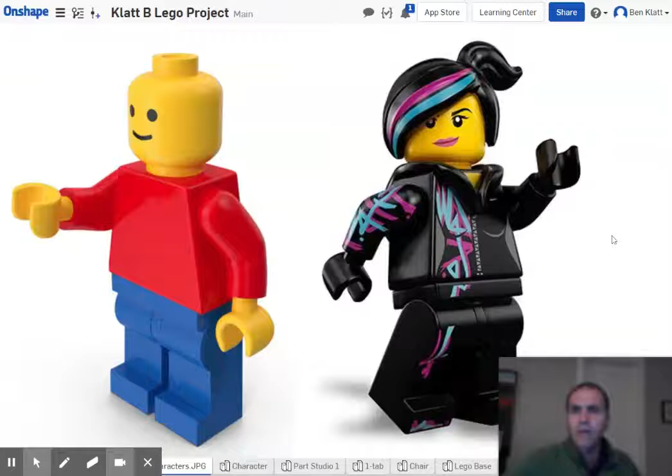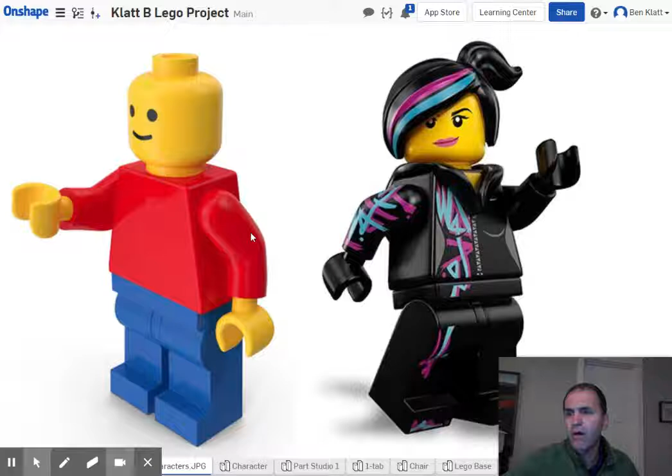All right folks, welcome back to our series on building Lego characters. We've got the body parts with the head, we've got the arm built, and now it's time for the hand, which is a little tricky mainly because this cylinder comes off of this other cylinder at a bit of an angle.

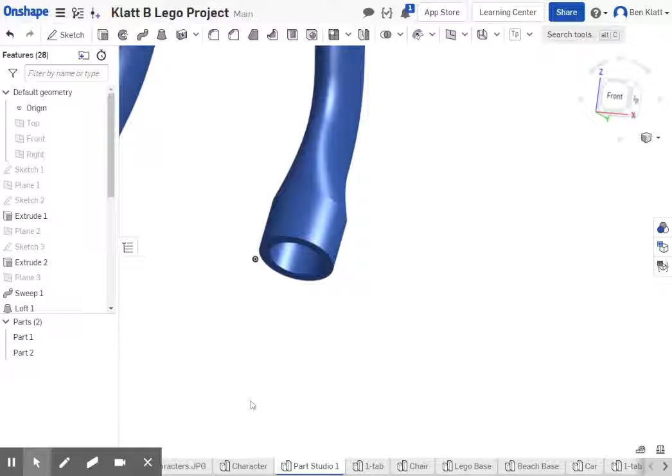Let's get started. First, I think the diameter of this circle is about 1.5 of that. So let's take a look at the arm we made and do some measurements. I know the inside was 0.125, the outside is 0.175. So we're gonna deal with that. Now I think I'm gonna make this in another part studio because there's no planes in here that match with the center of this, and I'll have to assemble it anyway.

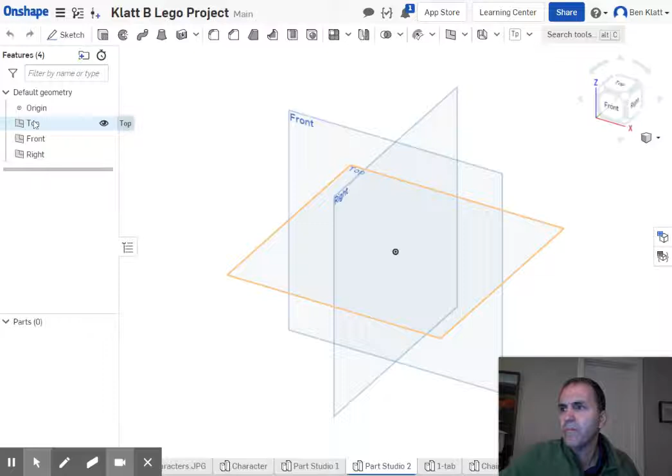So let's start a new part studio. It doesn't matter what we start on, as long as - I think I'll start with the top. And as long as I start at the origin, and that's going to become clear in a little while. So let's turn off all planes. Oh, I guess I didn't sketch on there. New sketch. There we go.

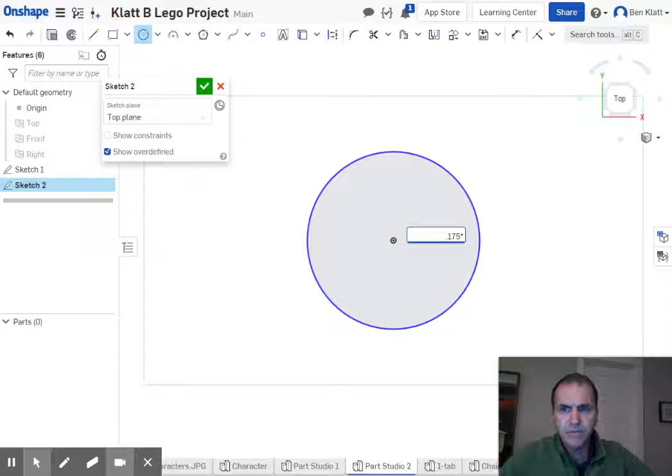All right, view normal. We're going to make that first circle hooked up to the origin. And the other circle was 0.175, and this time I'm going to put times 1.5. There we go. Let me make sure I had that right with the 0.175. All right, good, cool.

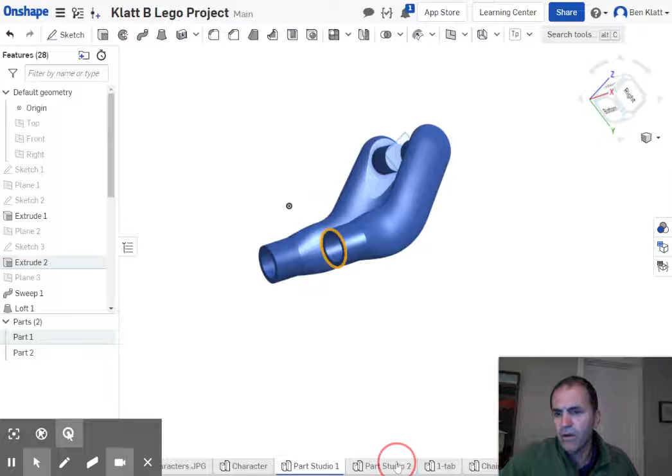All right, so here we go. That's going to be the main claw. There is another piece inside, and I wonder if we can make it as big as 0.25. We're going to have to make it its own thing.

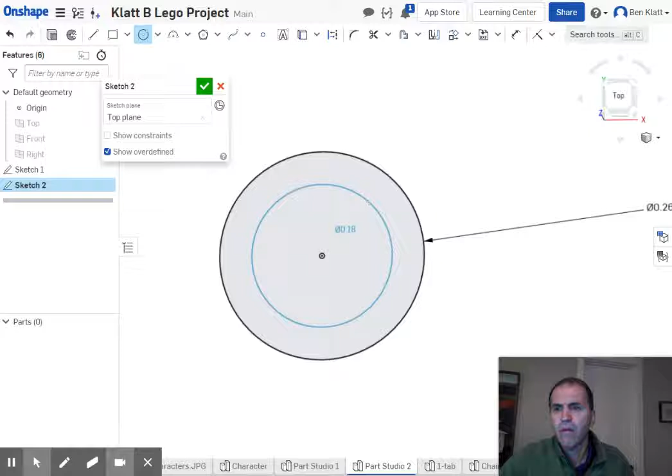Now, in case we make accessories later, like something for the arm to be holding, I probably ought to make this a normal size. So let's dimension that to 0.1875, which is a typical size.

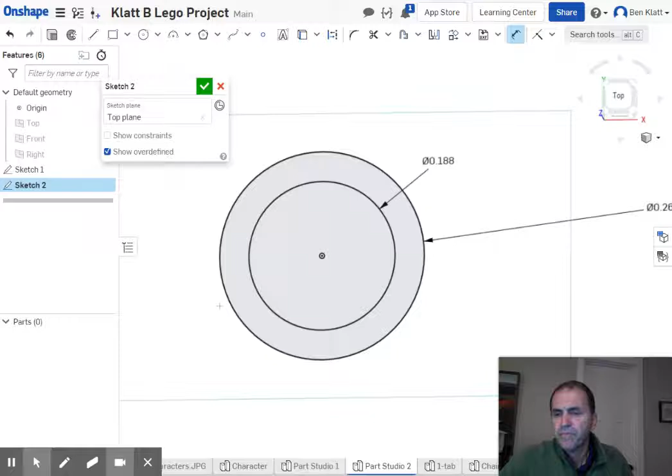And now we have to figure out how we're going to cut this thing. So let's take a look at how this is kind of cut. It goes pretty straight from here, maybe a little bit inward. So we're going to kind of come out like this. There we go.

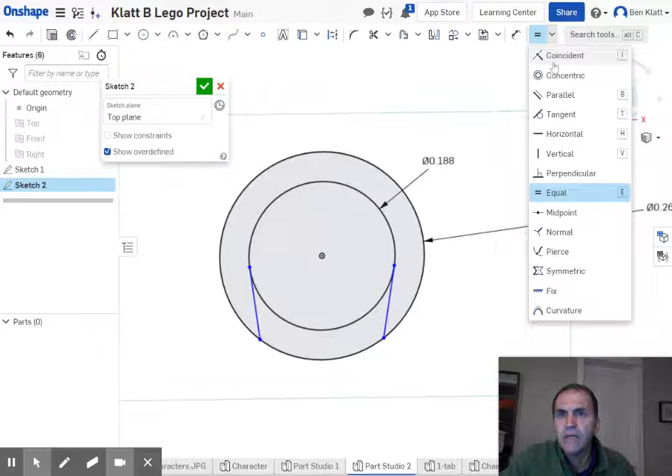Again, we're going to use our constraints to do things like a coincident constraint between this and this, and that and that. Let's make these two things equal to each other, that equal to that, and some tangent constraints to make sure that's smooth with that and that is smooth with that. All right, good deal. Let's make sure by hovering over them, I can tell if I did it or not. All right, good deal.

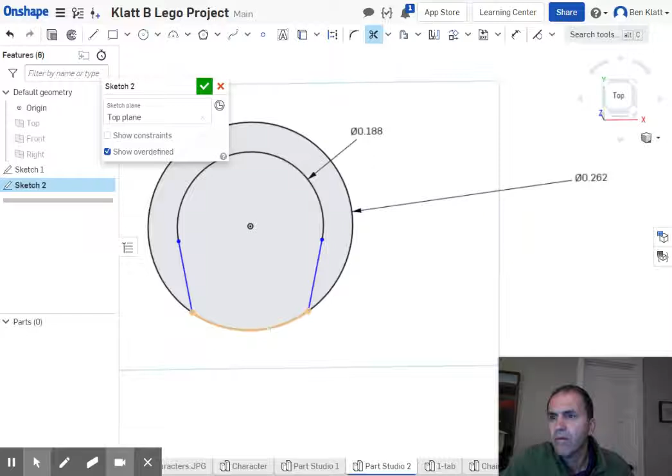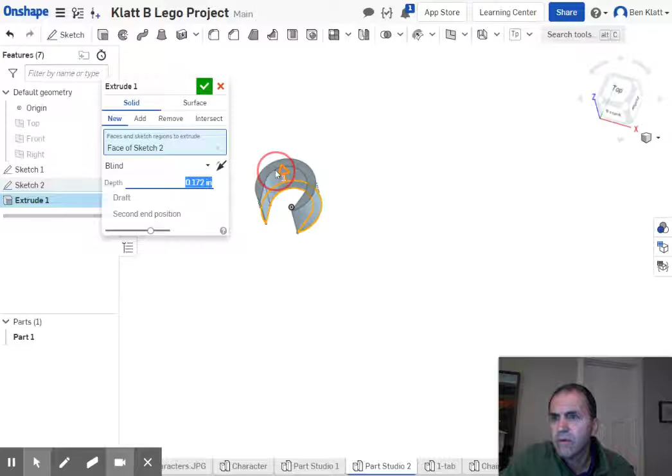Now move that in just a little bit, about like that. Now we can do some trimming, and some filleting that I think I'll do in a little bit - I think I'll do that second rather than now. So we're going to extrude to what works. Again, we're trying to make it look about right.

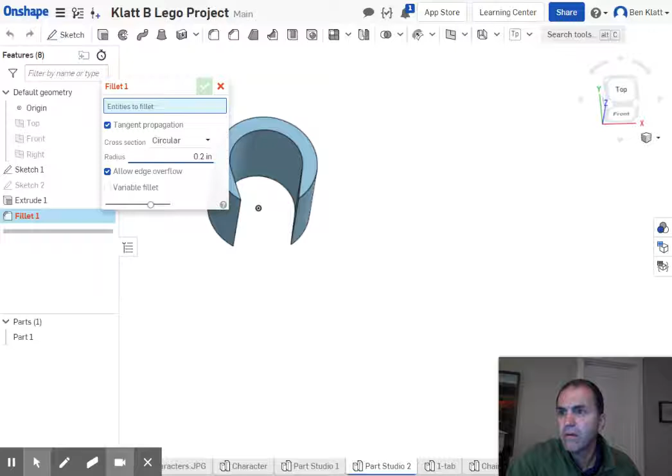Okay, let's go 0.22. That looks pretty good. Let's fillet these little corners just a tiny bit, like 0.0 something, and just take a look and see how it looks. Well, that is not very much. I don't know why it didn't like one side. Huh, let's try that again. Not sure why it didn't want to do that.

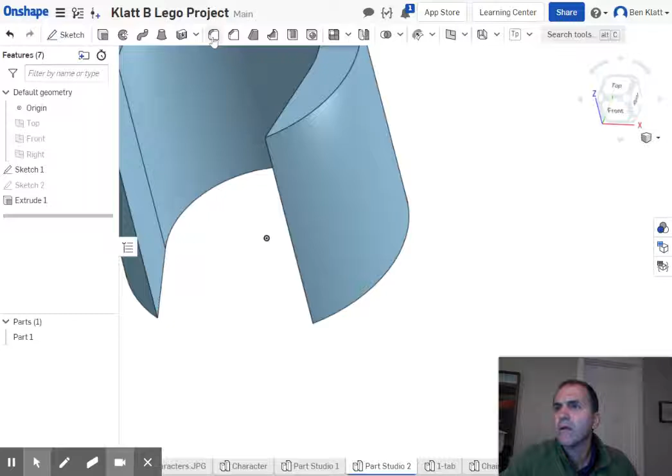I'm going to fillet this edge. I know 0.2 is going to be too much. Let's try 0.05, just to see how that looks. It does not want to do that. All right, well, let's delete the extrusion and see if we can go back into the sketch.

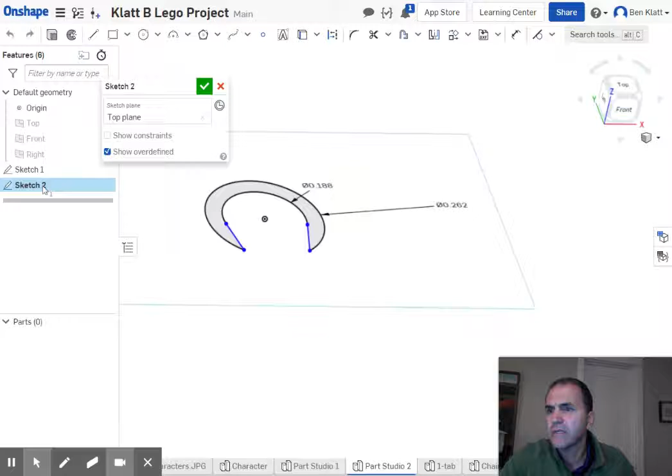Now why do I have two sketches going on? That's kind of interesting. Let's turn off sketch 2. Yeah, sketch 1 doesn't have anything going on, I'm going to delete that. Always pay attention to your browser, because it's telling you things that you might not know from your vision.

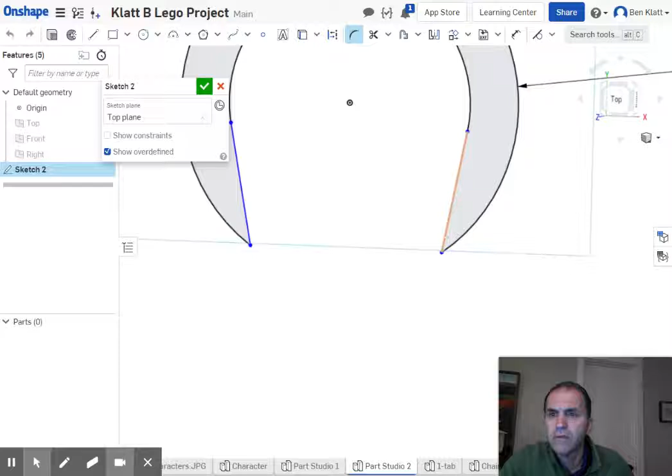Okay, we're going to try and fillet this, and go from here to here. And I'm getting that same problem I was having before.

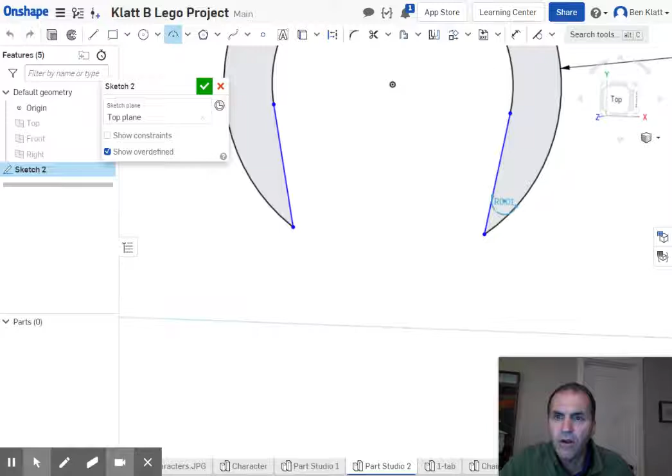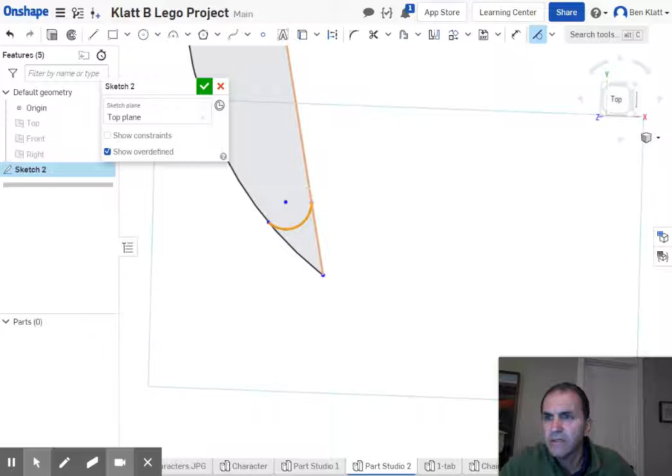All right, I've got a different way of doing this. We can go back into our sketch and draw an arc instead. We're going to go 3-point arc from there to there to there, and make tangent constraints, that to that and that to that. Do the same thing over here, to there, to there, and tangent. Whoops, tangent, that to that and that to that. An easy way of making sure they're the same is I'll make them equal to each other, like that, equal to that. And just for good measure, we'll do a horizontal constraint between the center points.

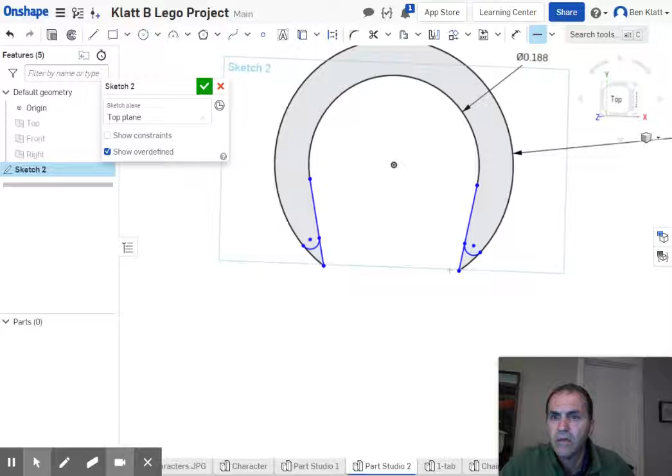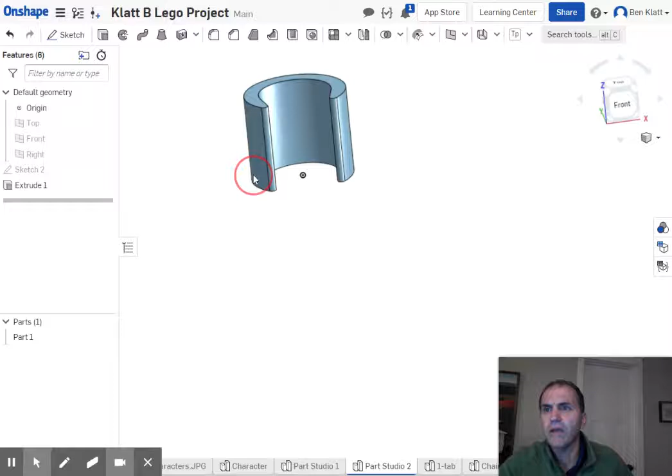All right, and now when we extrude, I'll just extrude that. Again, I think we went to 0.22. Like the way that looked. Can turn off the sketch again. Okay yeah, that looks much better.

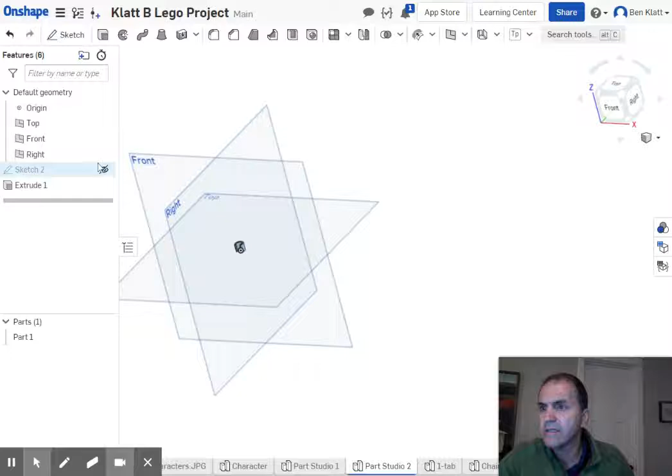All right, now we're going to draw that. Actually, let's sketch. I need to remember which plane went right through the middle here. It was the right. Okay, so I can turn off the front and the top. I'm going to sketch on the right.

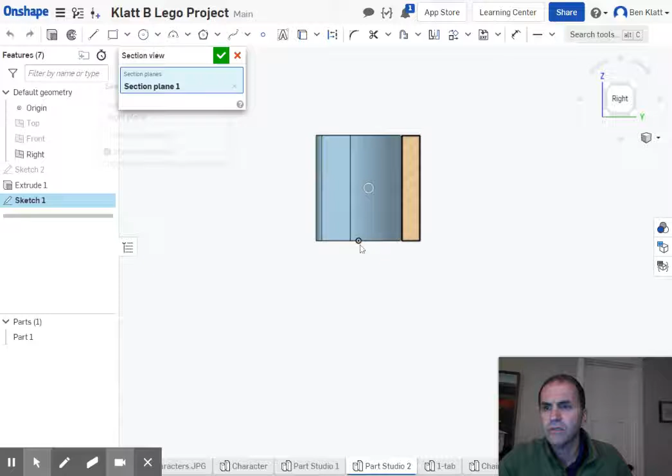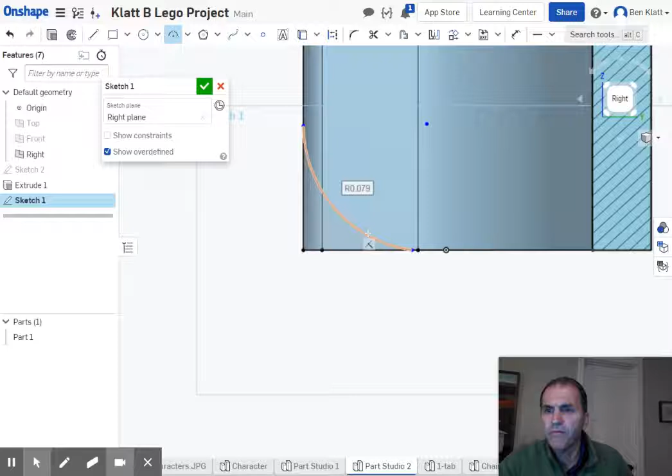I'm going to view normal, zoom in here, and also section view this so I'm looking in the middle because I want to cut off that little arc over here. I'm going to use this edge here and this edge down here. I'm going to make myself an arc. It's going to cut off the bottom, and again, using my tangent constraints. There we go. And finish my sketch. Let's turn our section view off.

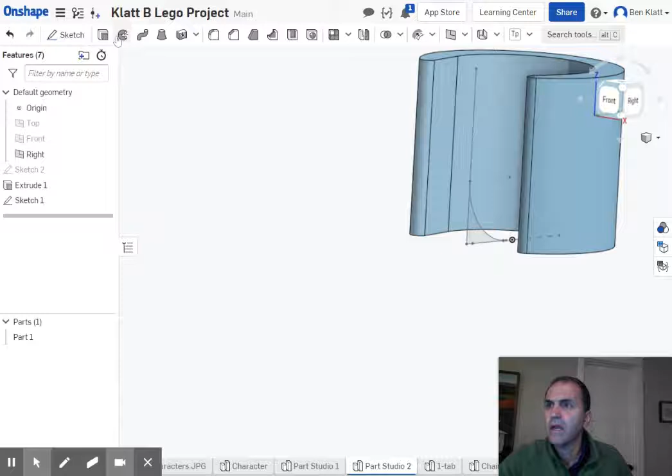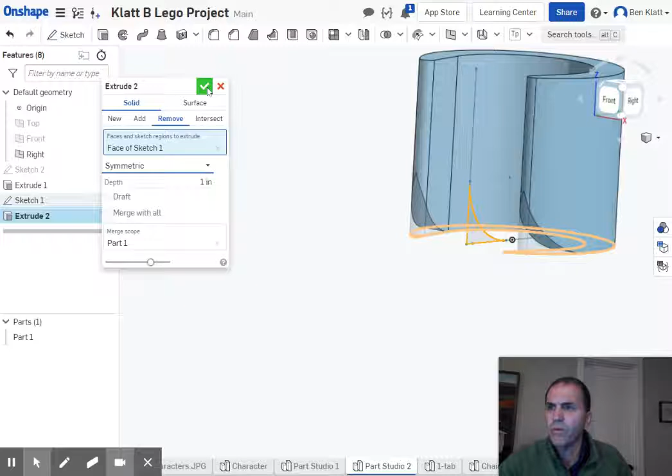And now we're going to take this guy and we're going to cut symmetric. We're going to go both directions. We're going to remove through all. Now I want to go through. There we go, I don't know why it went off symmetric. All right, yeah, that's starting to look a little bit more like it.

Let's see how it looks when I look at the characters. Probably need to cut off the top part too. Let's go back to that.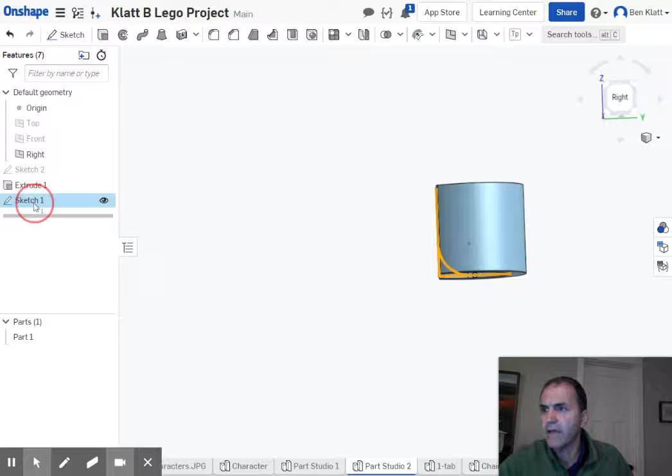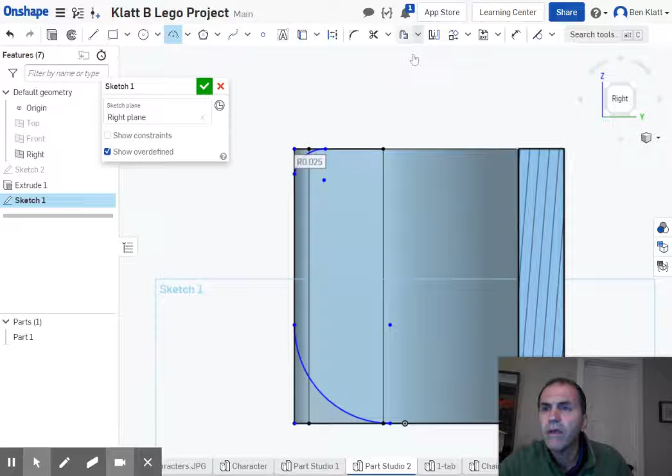So let's delete that and go back to our sketch 1 section view again. This time I am going to also project these edges up here. Make another smaller arc than that one, just kind of smooth it out a little bit. And we're going to tangent constraint again. And see how that looks. That's looking pretty good, I like that. This time, turn my section view off again.

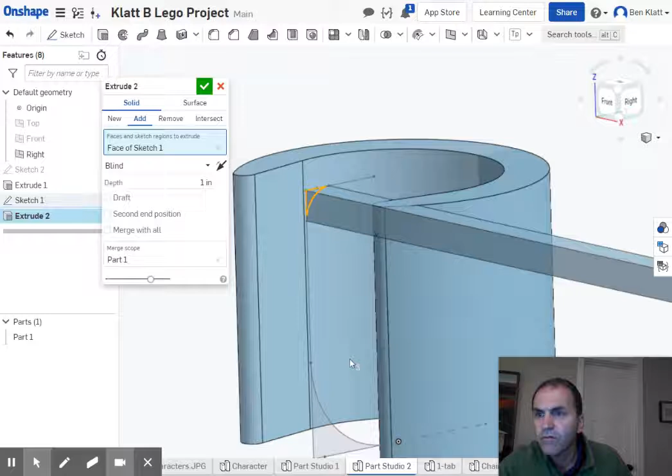This time I'm going to extrude both of those things, this shape. I'm going to remove symmetric. Okay, and right now I'm going through all of it. All right, much better. Now we could do filleting and everything else, except that's looking as good as I'd like it to look.

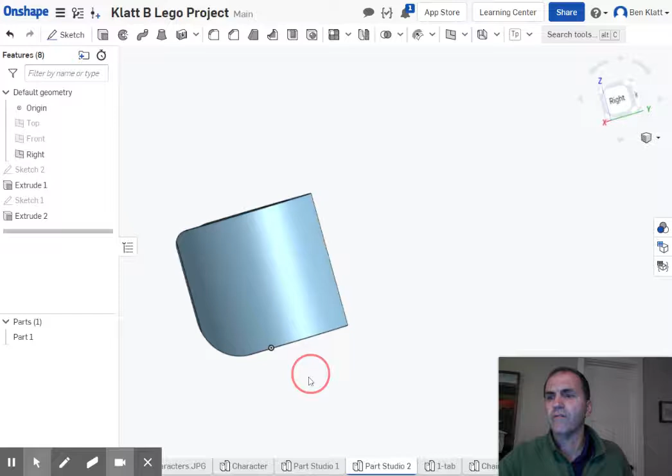All right, so now we need to do a sketch on the right again. I'm going to section view again. And this time we're going to make that little peg that comes off, but it comes off—if we look back at this—it kind of goes downward at a little bit of an angle.

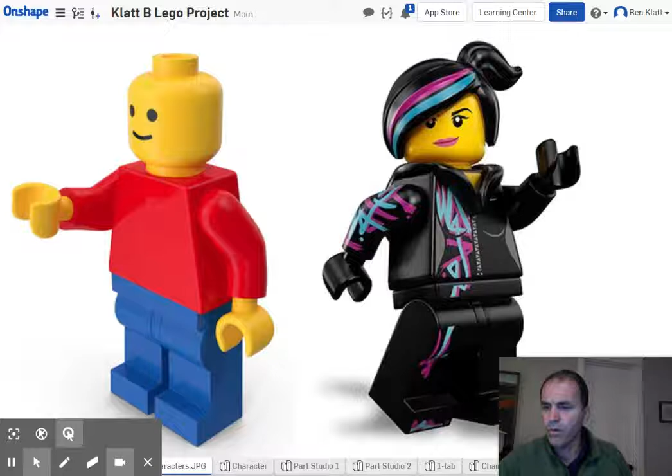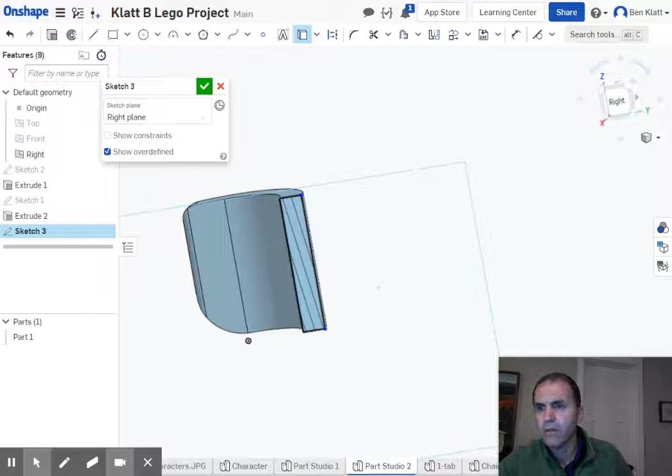So we're going to make a line here. And in fact, I think I'm going to do just a revolve here. So use that edge. Let's get straight on again. I'm going to draw a line from the midpoint. There we go. But I'm going to go at a little bit of a downward angle here.

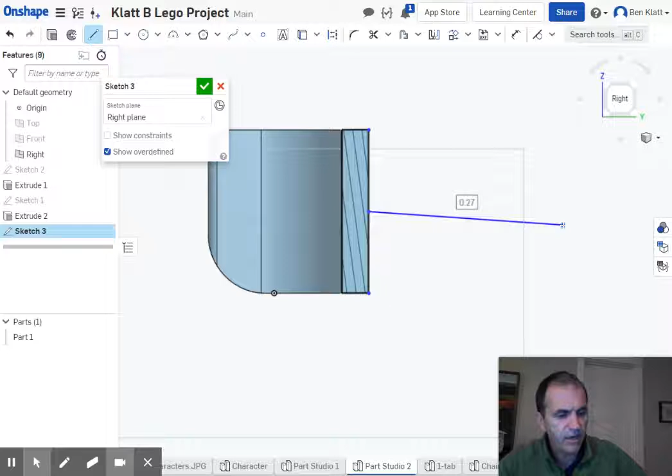Now it's going to stick into the arm piece, I think 0.125, so I think I'll make it 0.25 long. So it's sticking out 1/8 of an inch and also around.

And now we're going to make a rectangle, but I need it to come into the part a little bit. So I'm going to come inward, line it up. That yellow line, notice it means that it's lining up with that. We're going to come out perpendicular. That's what I want. And the distance is going to be 0.125 divided by 2 because I'm only going to revolve half of that. Now we're coming over to here, we're parallel, that's good, and I want to be perpendicular to that.

And it's making it vertical. I don't want it to be vertical, so I'll change that in just a moment. Let's make a perpendicular constraint here to here.

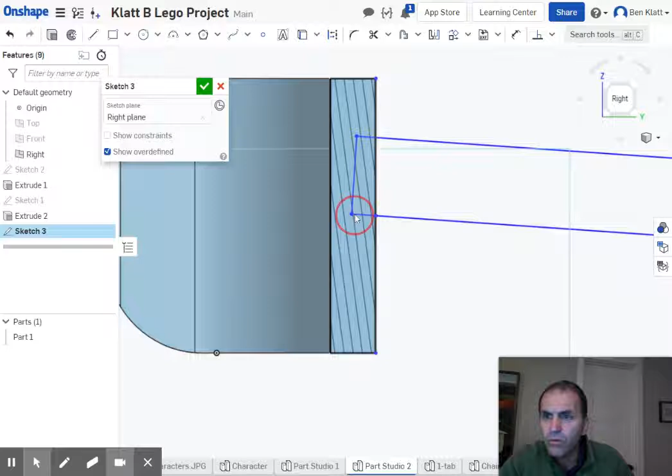Now I want to make sure that's not going to... oh wow, it's tilting a little more than I would like. I thought we were locked up to the midpoint there, but I don't want that going into other material. I'll make a coincident constraint.

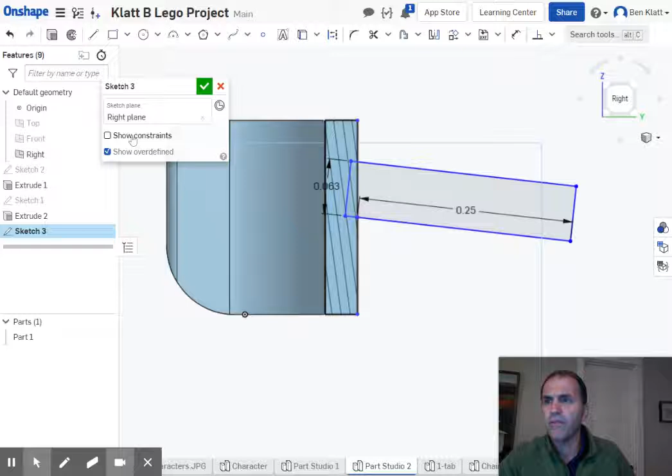And let's see how that goes. There is another method we can use if this doesn't work. All right, so we're now going to revolve.

No, I want both of those shapes. It won't let me select in here. All right.

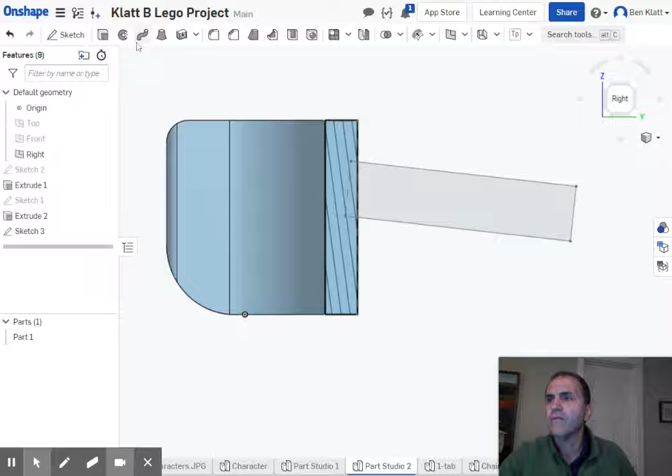As always, there's another way we could do this. Well, let's try and see what it looks like. So we'll revolve this shape around this axis.

I don't know why I didn't choose that. There we go. Ooh, boy. Let's see what happens if we make a new part. We can merge them later.

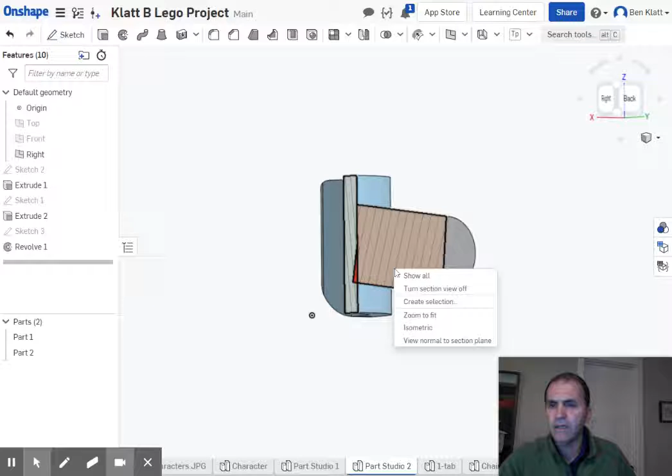And let's turn section view off and see how that looks. Yeah, see how it's got that funny little part sticking out there that didn't quite go inward.

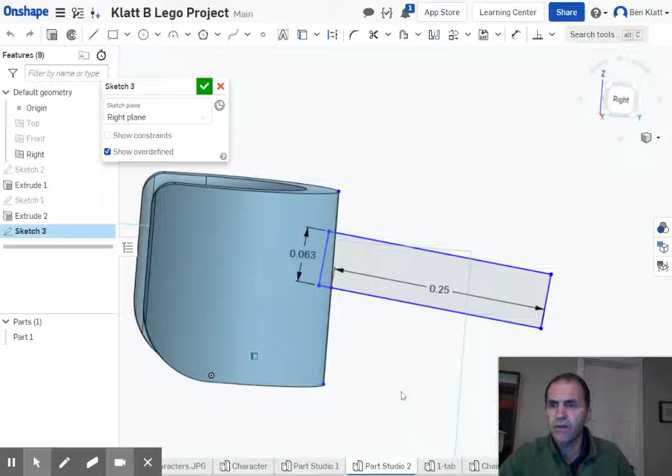All right, there's a better way of doing this, so let's show the better way. Actually, I'm going to use that sketch because it's already on the plane that I want, except I'm going to section view again, and I'm going to get rid of all of this stuff because I don't want it anymore.

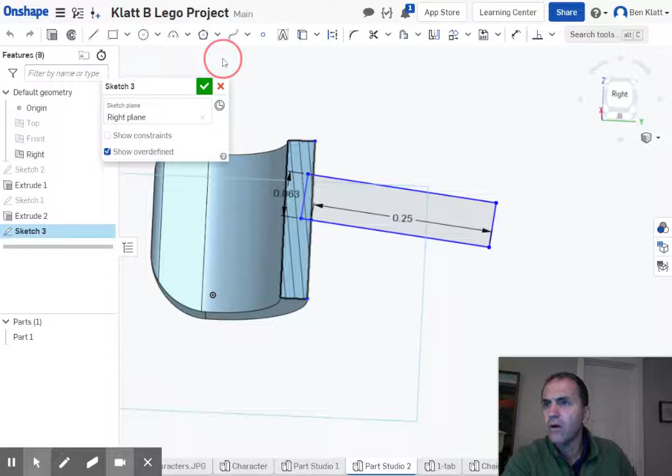Okay, I'm not sure why. Oh, I was still in the section view part. All right.

And every time I seem to click on the view cube, it wants to have a problem. So I'm going to now project this edge again.

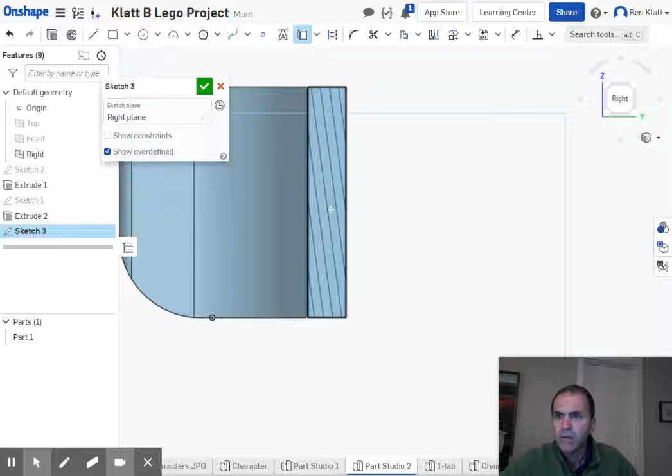There we go. And draw a line. Now it doesn't want to project these edges. Let me try that again. Use that edge. Okay, now it did.

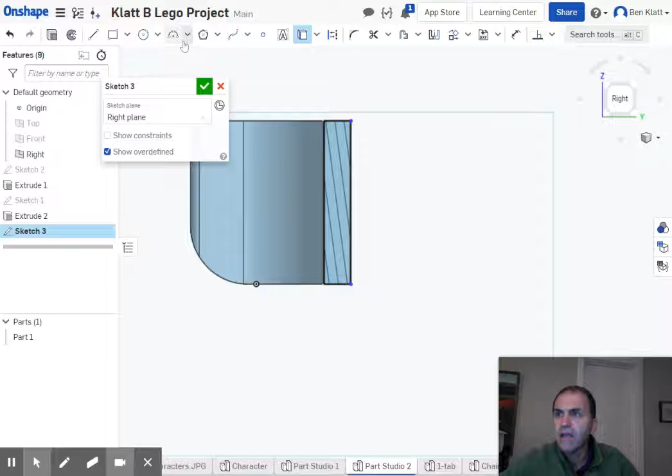And I'm going to draw that line, a line this time from the midpoint of that. Again, I'm going to make it 0.25 and at a little bit of a downward angle like that. We can change the angle later if we need to. All right. Good.

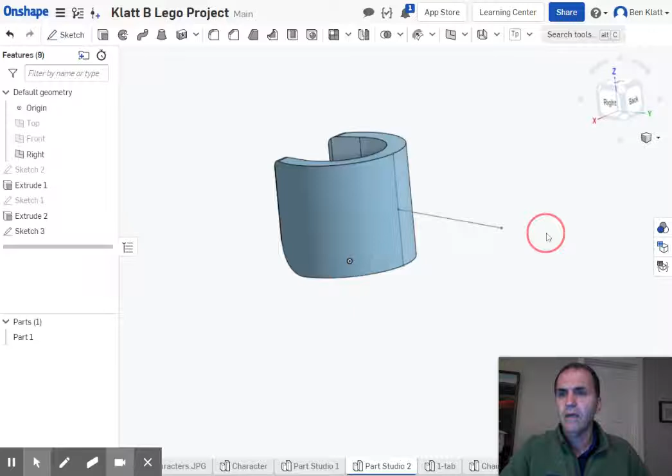Now, here's how I think I'd like to do this. I'm going to turn the section view off. I'm going to create a plane out here that is point normal - that point, that line, make it perpendicular to that.

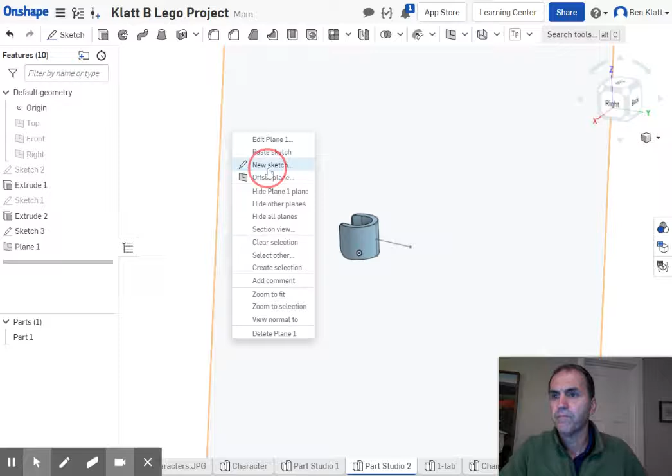I don't know why it makes the thing so huge, but it does. I'm going to turn off the right, and we're going to sketch on this plane, and view normal. All right.

Now, on that plane, I'm going to draw a circle that is 0.125. Finish that sketch. And now we're going to extrude that the other way.

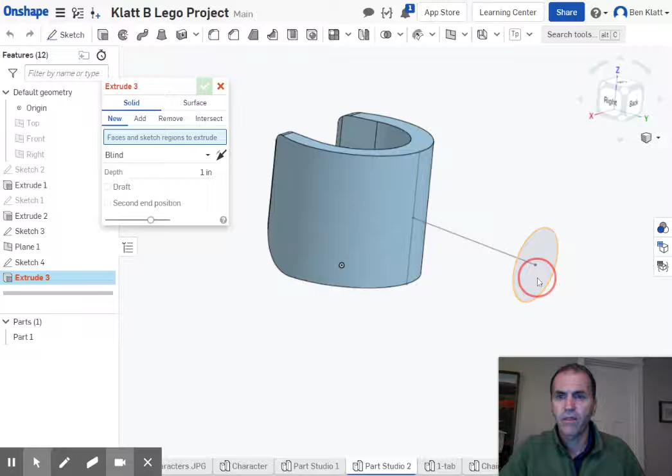We're going to go up to next, so that means as soon as it hits solid material, it's going to finish that. All right, we look good to go with the hand. I like it. That looks pretty good.

All right, so there's the hand. We have now finished the characters, the body. We've got the arms, and we've got the hand. Next thing is that we're going to put this thing all together.

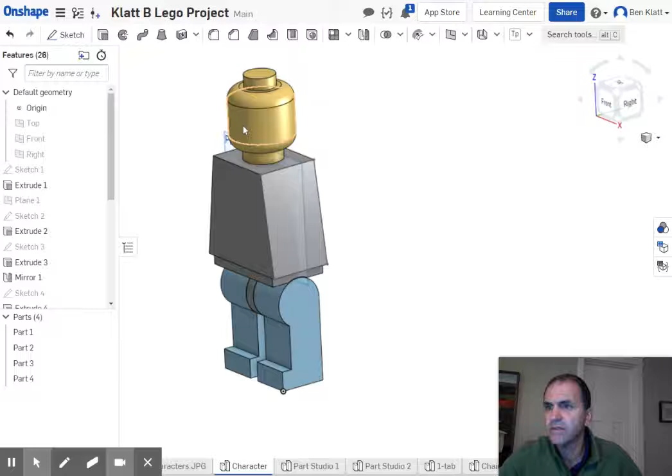I think I'll make the hand the same color as the head. So if I look at that head and say edit appearance, what did I choose? I chose that guy right there, 2 down on kind of the yellow one.

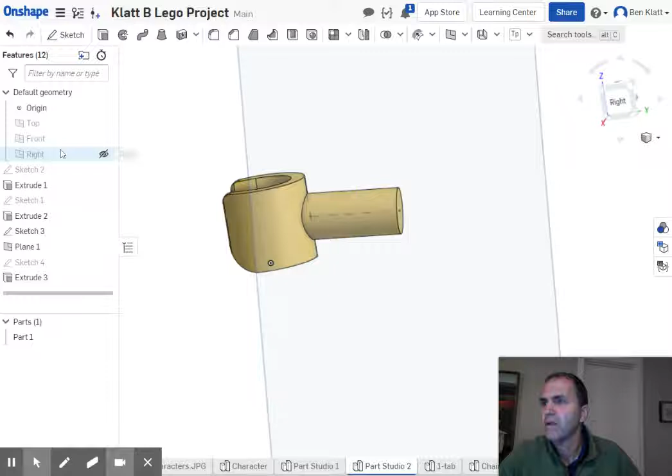So let's go edit appearance. Same thing, looking pretty good. And again, I like to turn off things that I don't want to see, like planes and stuff that I don't look at. Origin. All right.

All right. So next step, we'll put it all together. All right. See you on that side, when we do that part.